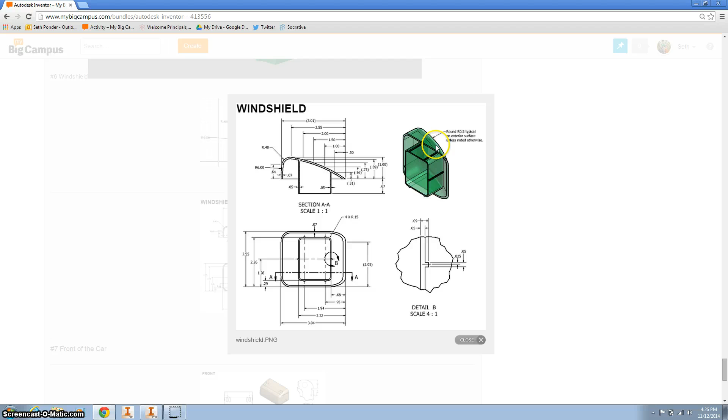Part 2 of the windshield is this little extrusion that goes both up and down. So we've got the top of the windshield done.

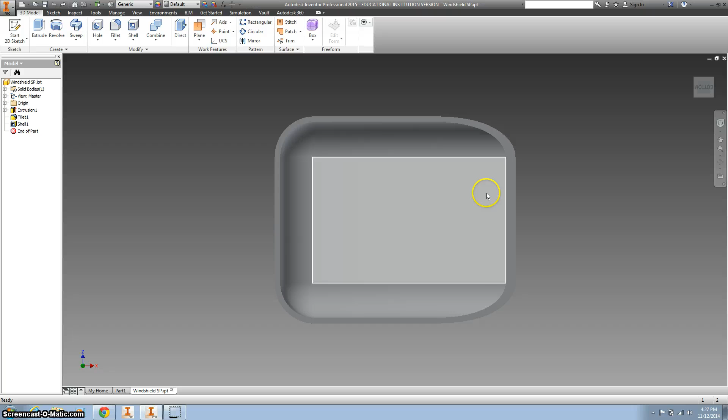Now we need to add a plane. We're going to go to the bottom of our windshield. Click bottom. I want to rotate it so that the front of the windshield's on the left side and it slopes down to the right side, but I'm looking at the bottom. So I want to create a plane.

I'm just going to hit offset, but I'm not really going to offset it. I'm just going to click it here. I want it at 0, and then you can see I've got a work plane right there, right on the bottom.

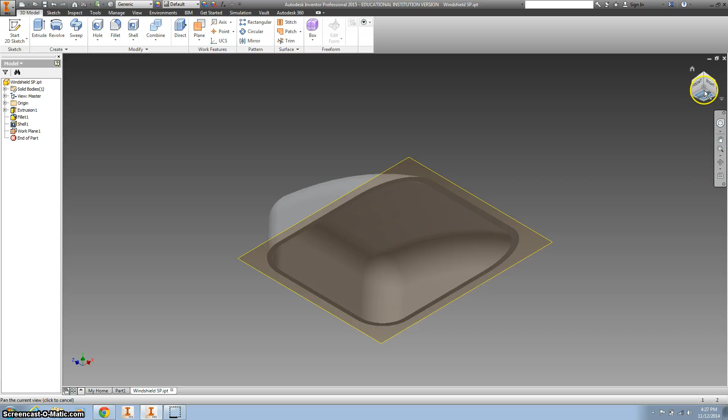Alright, so I want to start a sketch on the work plane, and sometimes this is tricky. There we go. I can click on work plane 1.

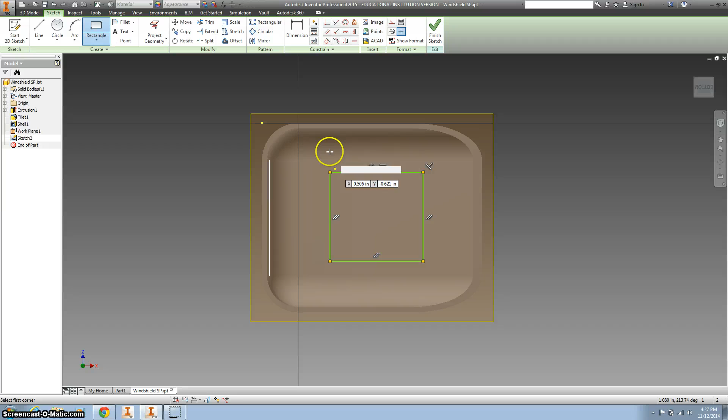I'm going to draw a rectangle right on my work plane. I just want to kind of right in the center. I want to start dimensioning, so I'm going to hit D on my keyboard for the shortcut.

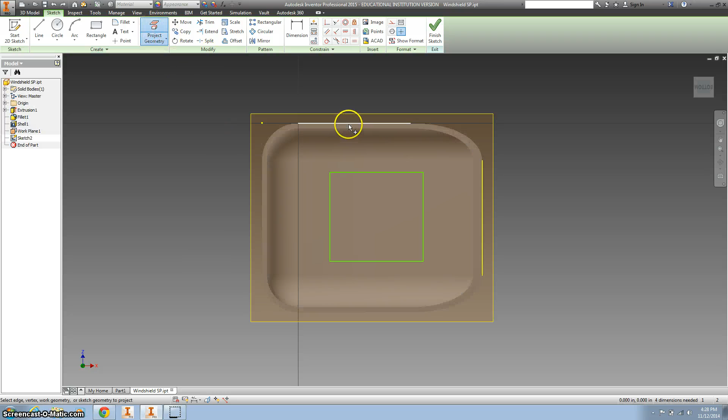Oh, I'm sorry, I need to project geometry. Project geometry, and I want the outside of my line. You could have just clicked this line and that line, that would do it. But I want to project my entire geometry, so I'm going to kind of be right in the middle of that and project everything off of there.

Alright, so I got my projected geometry in yellow. I've got my new green rectangle. Now I'm going to start dimensioning. Hit D on my keyboard, and I want this line to this line, and that is going to be 0.68.

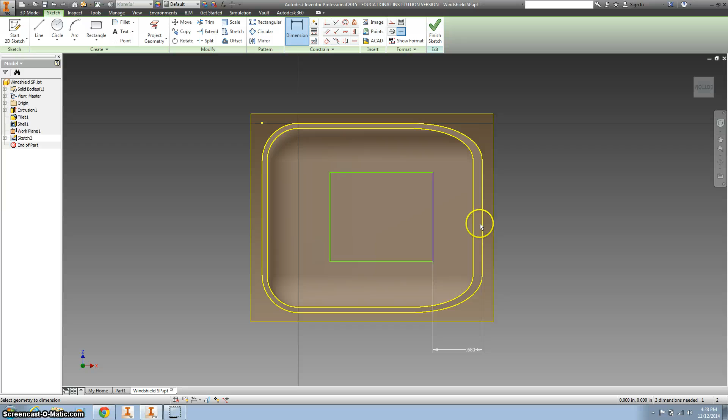And then dimension the far line. I'm going to be doing the outside of the rectangle, and that's 2.22.

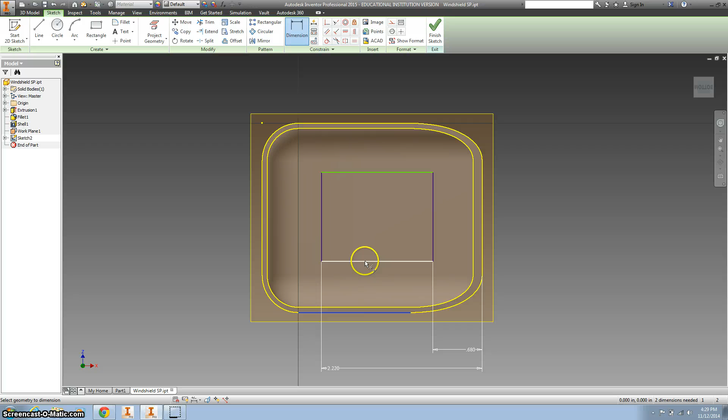Alright, I'm going to dimension here, and that's just 0.29. I'm going to dimension to the top, and that's 2.36.

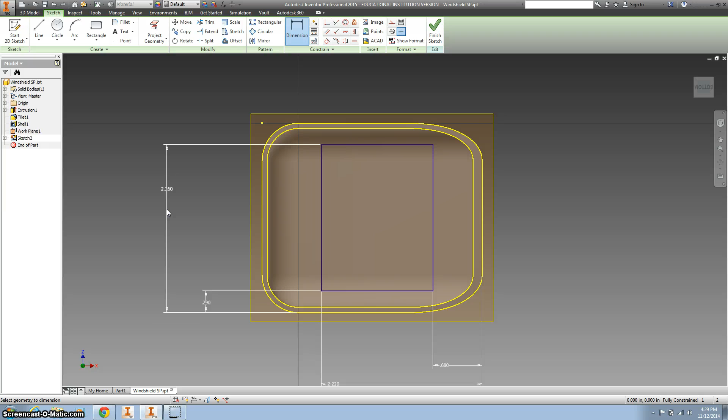Alright, and now I'm going to use my fillet, and those angles need to be 0.15. Click the lines, it'll draw the corners for you. Alright, there we go.

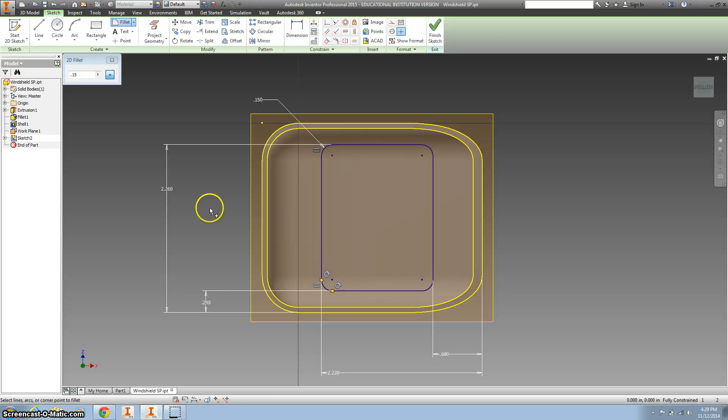And then I'm going to... fillets look good. Now I'm going to use the offset, and I'm just going to click on that rectangle that we have, and I'm going to bring it in, and all I need to bring it in is 0.07. Type that in, hit enter, and there we go.

Got a bunch of lines, got a bunch of constraints on there. To get rid of the constraints, you can hit F9. Alright, go ahead and finish that sketch.

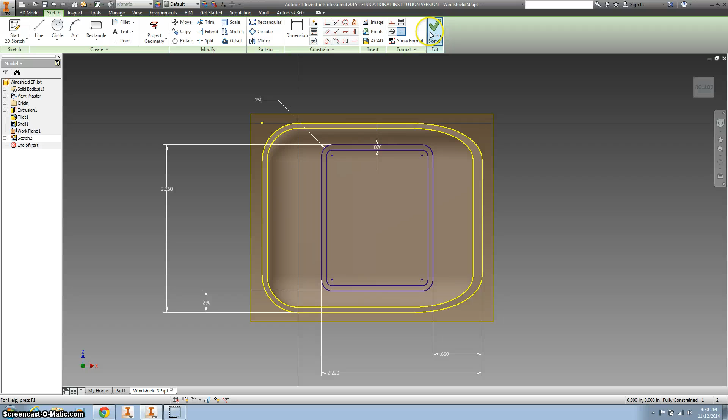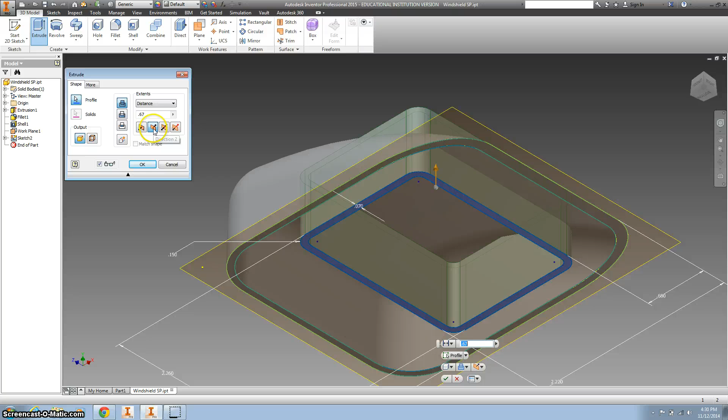I'm going to hit my home button. Actually, I'm going to look at it from the bottom. I want to extrude that we just created, so zoom in, extrude it. I want to extrude it up, but I want to go to next. Hit OK.

And then I also want to extrude it again down. So I'm going to click on it. I'm going to hit Create Sketch.

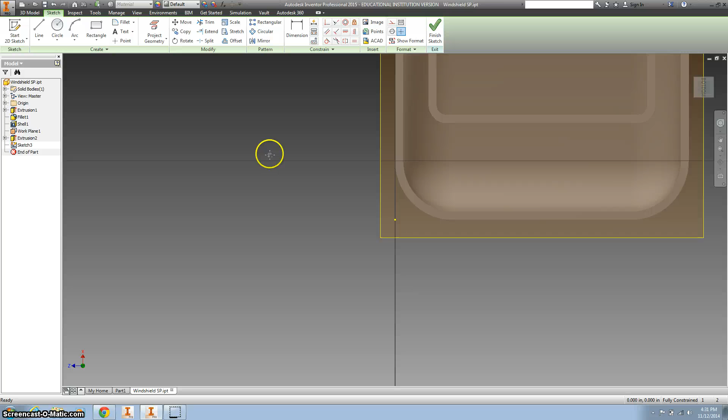Project my geometry. Now there's lots of different ways to do this. I'm going to project this geometry again. Hit Finish Sketch, which it just drew lines. When you project geometry, it just traces lines you've already done.

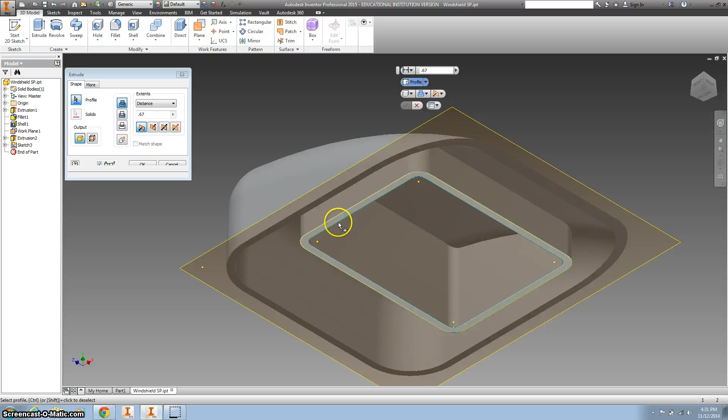I'm going to extrude that same thing. I'm going to go down, and I'm going to go down 0.67. Okay, so now I've got a part that looks like that, and we're about two-thirds of the way done.

So again, good. This is a good point to save your work.